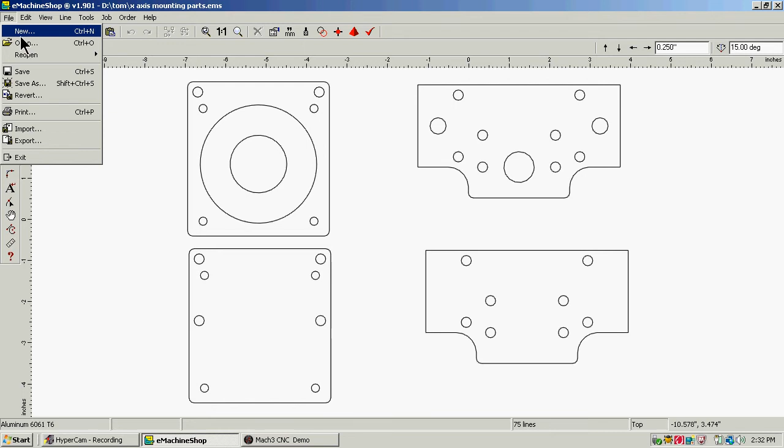I'll go ahead and open the files for you and show you - I've just simply numbered them. I'll open this now. If you look at this actual part, for D2NC its location really doesn't matter because you're going to tell it when you start that it's in the lower left section. I'm going to go to the next one, which is the drilled part, and show you the difference.

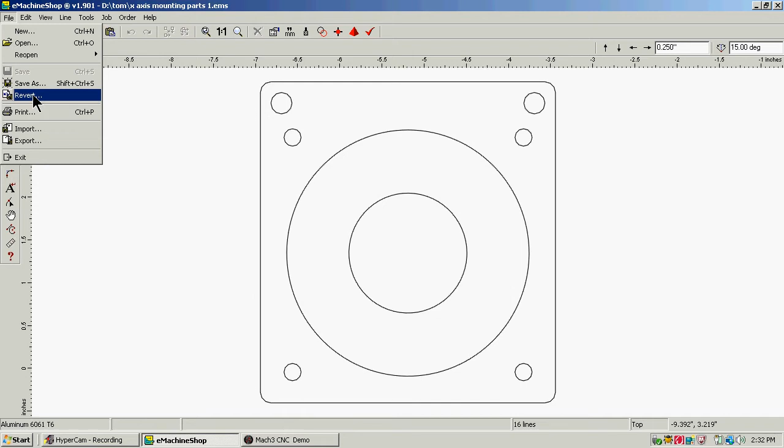We're going to go to drill one. And if you notice, I've taken this border off, and the center of this circle is 0,0. That's not a drilled circle - all it is is to give D2NC a 0,0 point to start at.

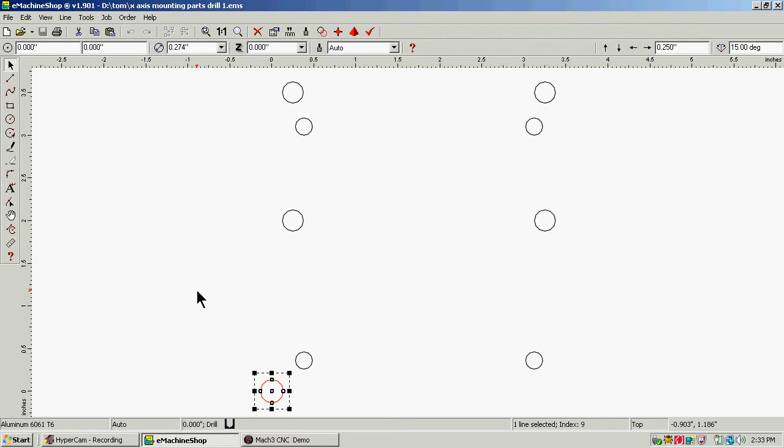It'll make a little more sense when I actually take these two over to D2NC and start showing you how to get the CAM software to produce the G code for what you're wanting to do. So this is the fix for that - this circle won't get drilled, it's just the starting point for the software.

Go ahead and open the other two so you can see them. The example on this one is that I didn't have to delete the border off of this one because it wasn't in the way. I just dropped this circle in the screen as a 0,0 point. So D2NC starts from there to locate each one of these bolt holes to drill, tap, or whatever I'm going to do at that particular location.

Okay, so right now I'm going to shut down eMachine Shop. I've already saved and exported all four of these files, and I'm going to go over to D2NC.

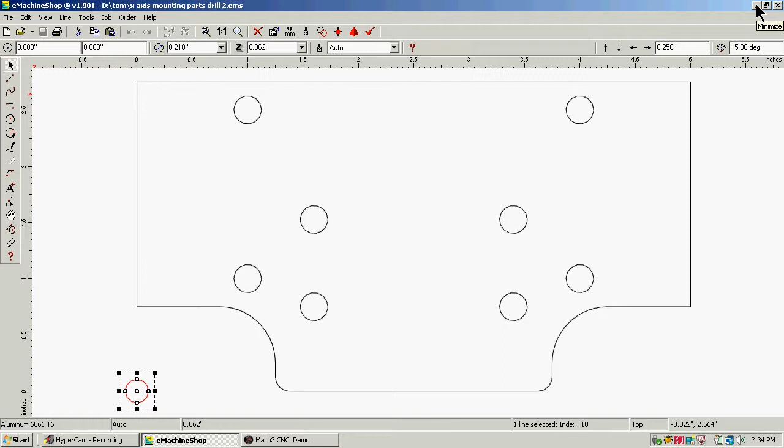Now, D2NC, when you get the software and download it - by changing a screen setting in Mach 3, you can have your actual D2NC button in Mach 3, which is really handy. You go ahead and start up the software, and you can click here to get D2NC.

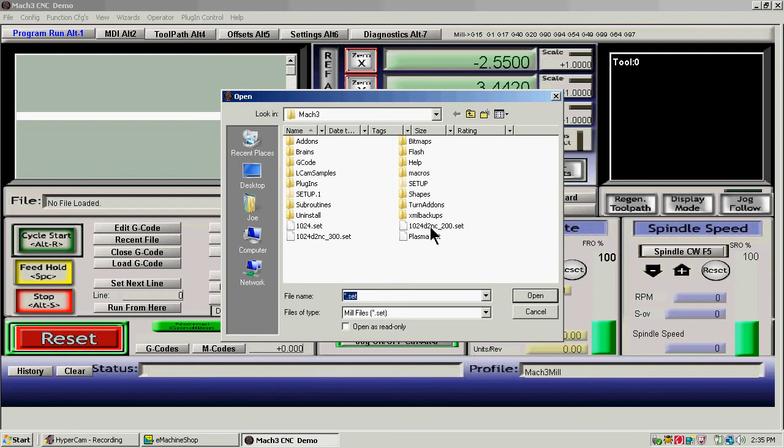Now, when you first install D2NC on the computer, you'll have to go into Mach 3, click on View, click on Load Screens, and then in Mach 3 you will see Milsets, D2NC Milset. You would select that and then open.

That will add the button to your screen because a normal Mach 3 screen won't have that. So continue on, let's go to D2NC, and I have an example file to show you the bug for the drilling that I was talking about.

So we're going to pick a CAD file, import it. I'm going to pick the example first and show you what it does. This is my first drill hole here, but in reality, 0,0 should line up this part's down here on the lower left corner.

Clicking next, I'm sorry, let me back up, restart. I get ahead of myself. Import DXF, example again, open. Sorry about it.

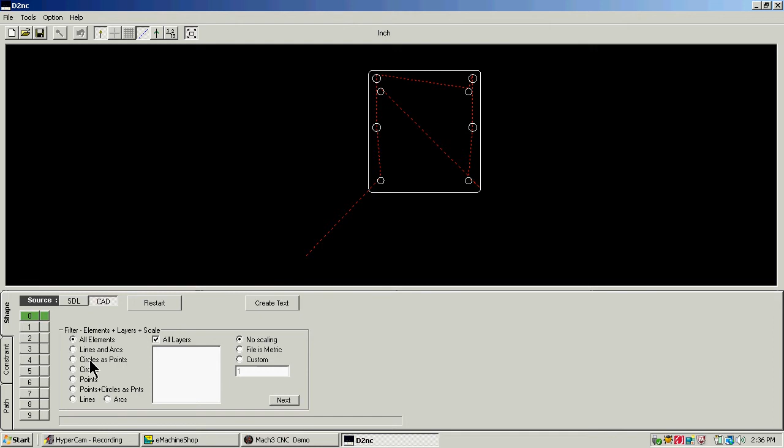Over here on the left-hand side, you can pick just circles as points. So it'll look for all the circles on the screen, and it'll make those just points.

Then when you click next and put bottom left, if you notice where the pointer is here, it has made that 0,0. It actually moves over a little bit, but that's a 0 point. In reality, the 0,0 of this part is down here to the lower left. So that's the workaround I'm showing you.

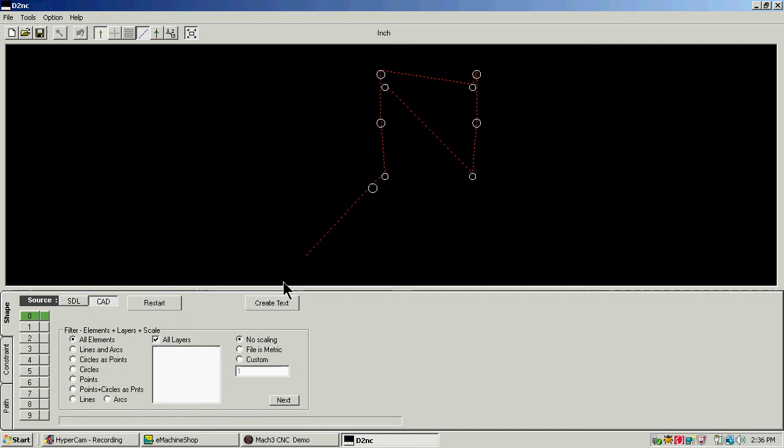Now I'll reopen this as the drawing that I put the circles in the lower left corners. So we'll go here with the same drawing and open it, and you can see now that I've put an extra circle here that I'm not actually going to drill.

So on this one here, we'll click on circles as points, and you can see that this first point is 0,0, and when I click bottom left, that is the 0,0 point of your part in XY. So to do this in D2NC, that's the workaround.

This is just going to sit there at 0,0. When you hit enter, it's going to go to the next point, the next point, the next point.

Now, in D2NC, you can select the order that you want it to go to each location, which is really handy. Let's say after you get done center drilling all these spots, and you have maybe 4 bolt holes that are one size drill bit, and then a couple holes that are a different size drill bit, well, you can arrange that order so that you're not changing the bits back and forth, and you can tell it which one to go to first, second, third, fourth.

You'll have to play around with the software to get into that, but I'm just going to go ahead and generate the G-code for this. This is a real simple one, it's easy. I'll click Path,

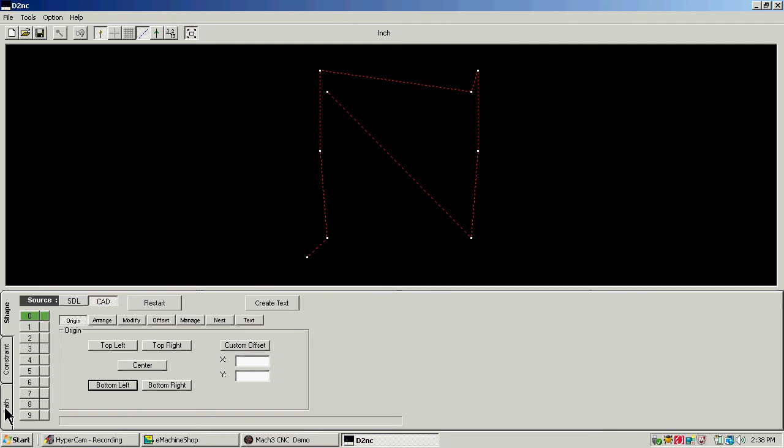and I will click Position and Pause over here under Other. And what that's going to do is just go to each location and stop, and then you can do whatever you're going to do at that location, and it'll generate the G-code for it.

So if you look on the screen over here, let me go to the larger toolpath. Now you can see that this is the actual course that it's going to take, and each time I push cycle start, if you watch the screen, I should have zeroed it, but here we go.

It stopped at 0,0. We're not drilling a hole there, so I hit cycle start again. Move to the next location, you drill your hole. Moves to the next location, drill your hole, and continues right on around until you finish.

This is really handy for locating all the holes. To me, it's a lot quicker than switching the cutters and having to mill the holes out, or trying to do it any other way.

If I hit cycle start, even in this screen, it's just going to do the same thing.

So we're going to go back out of here now, back into D2nc, and take a look at... it's asking if I want to use the same file. No, I don't. Okay, so we're going to pick our first part to actually machine out.

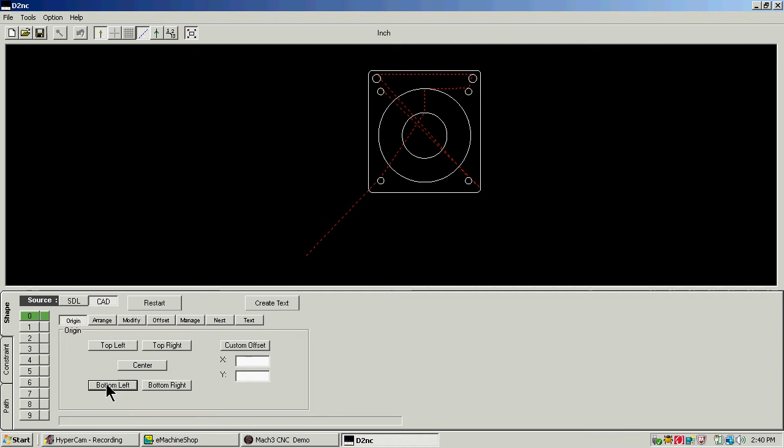That takes everything as you see it on the screen. Notice this is a drawing that I don't have the overlapping holes. I want to tell it to align the part to the machine at the lower left corner.

Then I want to go into constraints. I want to tell it that my safe Z, I'll use a 1/2 inch for safe Z. My maximum feed is 50, let's say. Maximum spindle RPM is 3,000. I'm going to be working on light metals, aluminum, so that's good enough for that.

And then we can continue on, go back to shape. Now we want to pick our offsets. So for this particular part, I'm going to just go ahead and cut the part out after I've drilled it. I, of course, would do the drill cycle first, but then I just want to cut the part out.

So I'll put a pretty good sized cutter in here so that I can get the distance from here to here without pocketing. Instead of pocketing this whole thing out, let me go ahead and pocket. Let me go ahead and select this.

So we'll go offset. I'll put in a tool diameter of a 1/2 inch. I'll select, this is my first machine process, and I'm going to pocket it. I'm going to tell it to step over 50% and go ahead and click offset. And what you see now is, because I selected that first, the hole in the center I can't find.

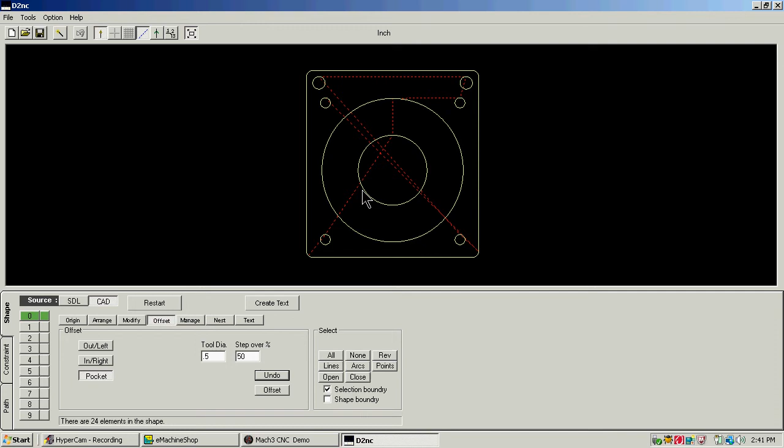So let's undo this and pick the hole in the center first. Let's do an inside at a 1/2 inch. Go ahead and offset it so it scales it down. Now I can pick this next one, click pocket, click offset, and this is just giving it tool compensation.

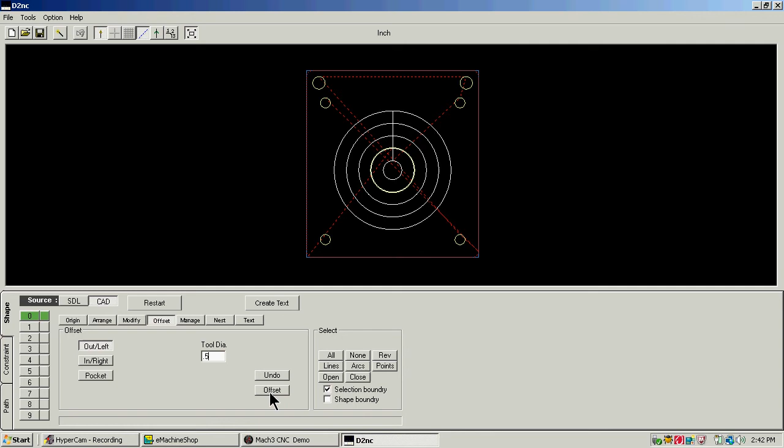Then I'll pick the outside, which is my final, and I'm going to do an outside and offset. So now I've set all the tool compensations for this particular part, and it redraws it.

Now I can take this to path, click contour, click local shape, don't select any of them, and pick each particular section I want to do, and what I want to do first, second, and third will show up in the order. First I want to take out this pocket, so I'll move this over to work with it.

I want this pocket to be, let's say, 0.1 deep. It's just a little recess for the front of the motor to sit in. Let's do it in a step of 50 thousandths.

It's going to do a speed. I can ramp this. Don't ramp pockets in D2nc, because instead of continuing to go down and down and down, if you ramp, it will go the distance of the ramp and then reverse direction and go back to 0 and then start over for every pass. It makes it take longer.

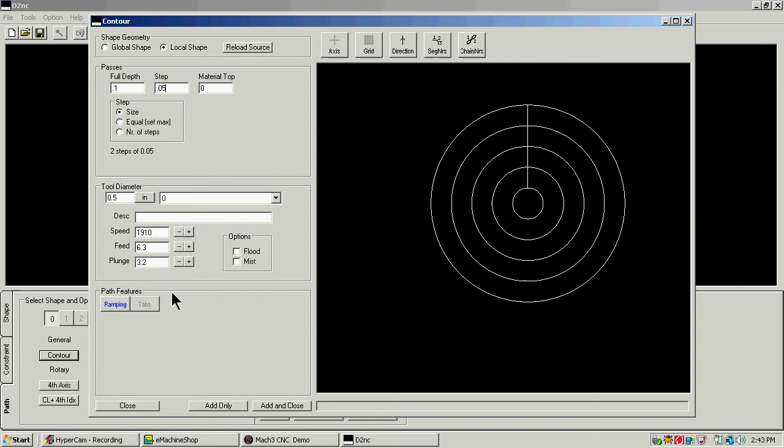You're better off just setting a plunge rate, make sure everything's good here, and adding it and closing.

I want to go back to contour. I want to select, I got to click local shape, none, and I'm going to try to pick up this inside circle here. There, I got it. I'm going to move that in.

My material is 1/2 inch thick, so I'm going to say 0.510. Go an extra 10 thousandths. Let's take 50 thousandths per pass.

Equal steps. Same here. Now, this time we will pick the ramping. It doesn't pick the tool up in D2nc and return to 0 on each pass. It will just continually spiral down completely through the part. So we're going to pick ramping.

We'll let it calculate it. It has it at 2.82. It says its maximum is 2.83. That's good for a plunge cut. You want a longer ramp instead of pushing the cutter straight down. So just going to add and close that.

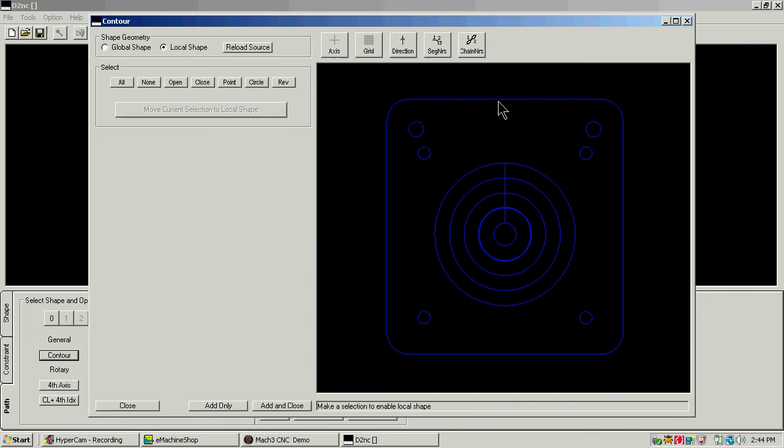Once again, we're going to click on Contour, Local Shape, None. Select the outside. Move the current selection. My material is a 1/2 inch thick. We're going to take 50 thousandths steps.

We're going to ramp the outside. And this time here, when I select my ramping, it says 4. That's acceptable. Okay, I'm also going to add some tabs so this part doesn't just drop out.

So under the tabs, we can just go ahead and let it do it. I can tell it how many tabs I want, 4. Now over here at the side, you can decide where you want the tabs, how you can locate them where you want on your part, different shapes. You're going to want them in different locations, different chains.

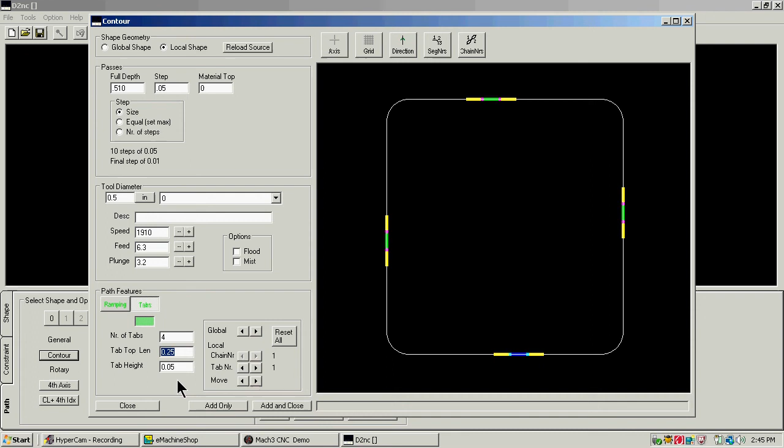Okay. Once you get to this section, here is each one of your machining functions. This second one here, if you remember, I already pocketed out the material above it.

So what would happen is for a 1/10 of an inch, this cutter would spiral down in just mid-air, coming from 0 to -0.1. You can actually go in and tell it to start at -0.1, and I'll show you.

Let's edit this one. I have it selected, and we'll edit it. It says material top. Well, there is nothing at 0 right now because we took it out with the previous pocket. So here I'll put -0.1, and this will start machining at the material itself instead of in midair.

I'll update it and close it. I'll select all 3 of the machining functions. Now you can switch the order of these if you'd like. You wouldn't want to do it now after you told this to start in a -0.1 position because it would definitely dig into the material. But here you can actually mark each one, move them up and down, and switch the order.

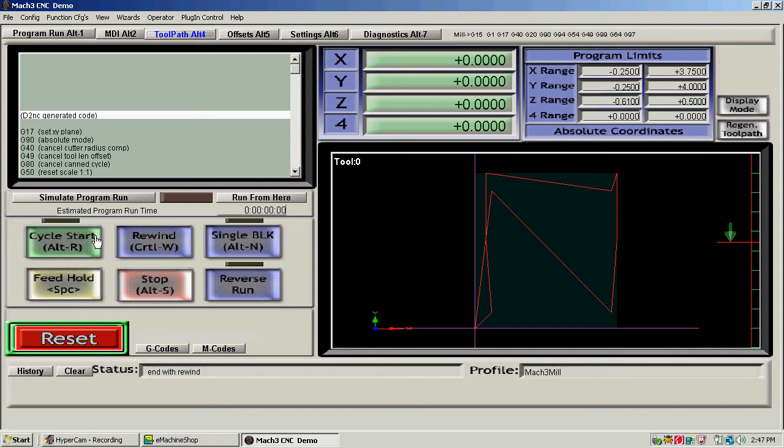We're going to go ahead and generate the G-code. Go to Toolpath, and regenerate in this big one. Then you can see the actual part as it's going to be machined. Now it's not showing the actual part - it's showing the corrected tool path with the compensations.

But at this point right here, you're going to end up with some pauses in your program. They're going to be because each individual machining operation calls for a tool change. And if you go in and edit these, if you come down and it's finished out the first pocket, you can see it's going to give you another tool change right here when it's going to the next one.

You can click Edit back here on the Run screen. You can actually select this right here and just delete it out. So it still has the same size tool in it. It will just continue on then from the 0 point and then go ahead and take out and move to the next and the next.

So if you see these in here and you don't want the pause, just go into the program Run, click on Edit G-code. It'll bring it up. At this point you can name this instead of it being called D2NC.tap - you can rename the file.

But see, here's your first tool change. You can scroll down through, and you see now for the next function, it's told it to turn the spindle off, turn the coolant off, and move to X0. So right here, I can just delete these two. I want to leave the coolant and the spindle on.

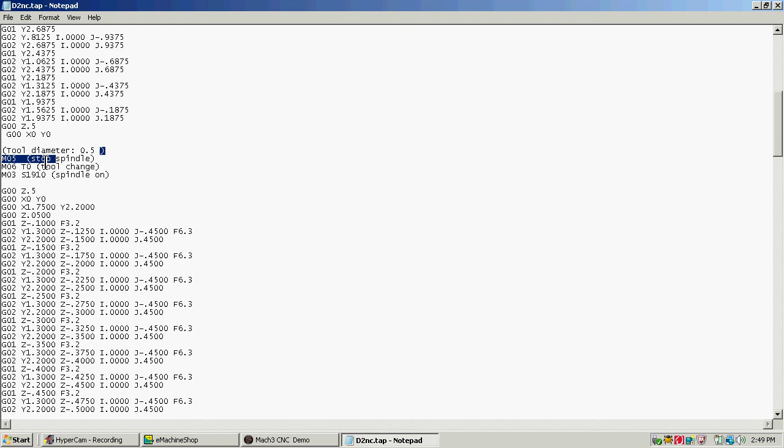Right here it's just giving an explanation of what size tool to put in the machine. We never shut the spindle off, so I can try to get this thing to select. There, we'll delete those. We'll just backspace. Take those out.

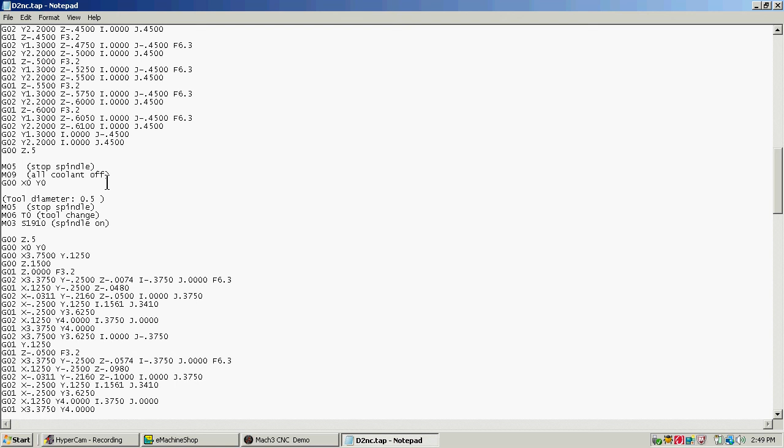Okay, come down to the next section. We don't want to turn the spindle off again. We just want to grab all this and delete it out. The gaps don't matter - it's just going to skip through them.

I can go ahead and file and click save, and it'll still be saved as d2nc.tap. Or I can actually change the name now, so this file doesn't get written over. I'm just going to go ahead and save it because it's not something I'm going to use again. So I'll save.

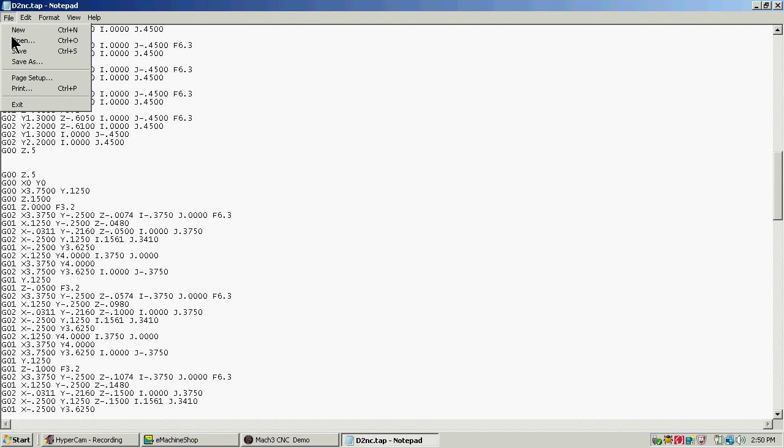I can say file, exit, and now the corrected one's in here. If I tell it to cycle start, run the speed way up, you can watch it up on the screen as it's running from position to position.

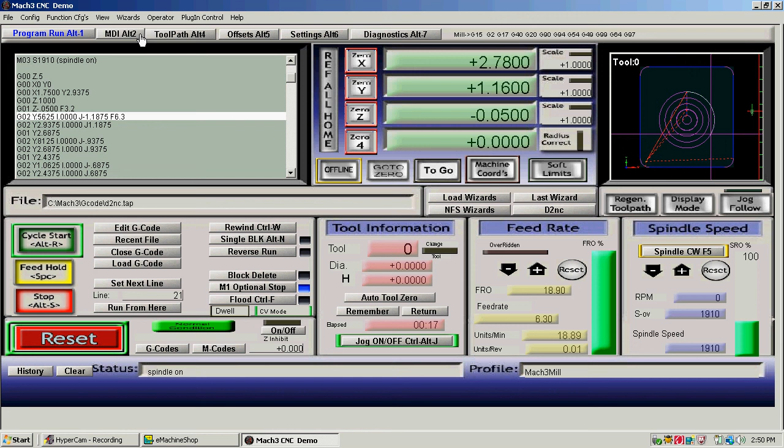And it won't ask for a tool change this time. Go to toolpath. It's probably a little hard to see, but you can see that it's running around there pretty quick.

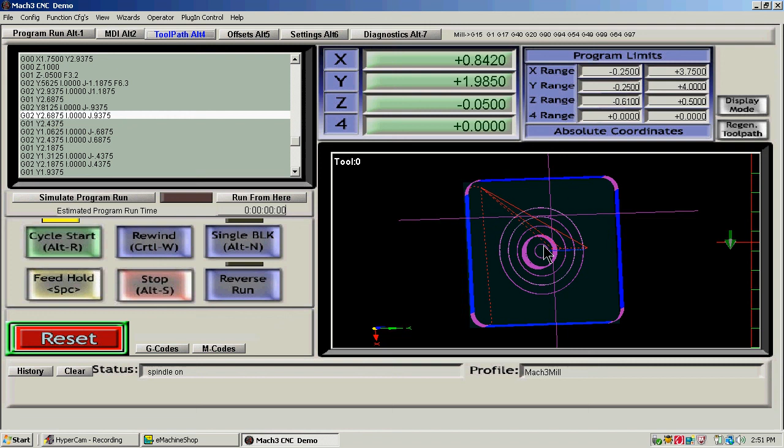I guess I probably should have just, while I was editing, put in a really fast feed rate - could have done this a lot quicker for demonstration purposes. But it's just going to go pocket out the top, immediately cut out the hole, immediately cut out the outside of this part, and leave the tab.

So I'm going to pause it here just a second, and if you look - I'll zoom in so you can see it - on the side of your part here you can actually see the tabs it's left so your part does not fall out. There's 4 tabs on this part, trying to make it so you can see them.

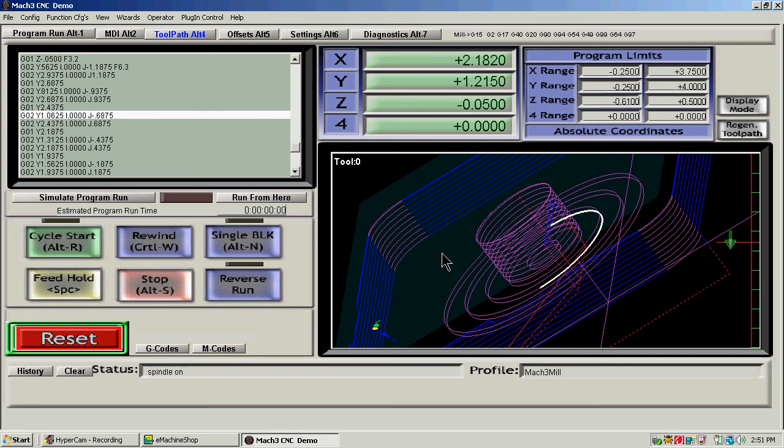At this point here, if we've already drilled all the holes, this piece would be done. Alright, I'm going to pause for now until I think of something else to record and upload this one.